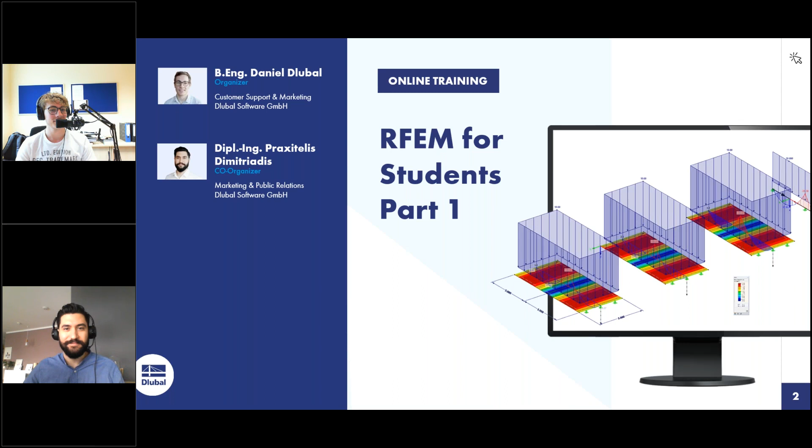Thank you, Praxitelis. Yeah, so as Praxitelis said, we are doing this training very interactively, so it will be divided into several sections and chapters, and after every chapter, Praxitelis will pick out the most interesting questions and we try to answer them as good as possible.

Short information about our training tool, GoToWebinar. We are using GoToWebinar in order to do these online trainings. First of all, if you do it, you see it like here. So here you have the possibility to show or hide this control panel of GoToWebinar, and here adjust your audio settings. So maybe when you can't hear us, please try to change your loudspeaker settings, and here you have the possibility to ask us questions.

Good. Then to the content of this online training. First of all, I will tell you something about the principle of FEA, the finite element analysis, or also FEM, finite element method. Then I give a short introduction, especially in the user interface of our program RFEM, and then we will model a continuous plate together. This will be the introduction example, and then also doing a stability analysis, in this case Euler Case 1. So we will have a clamped column and then a clamped frame.

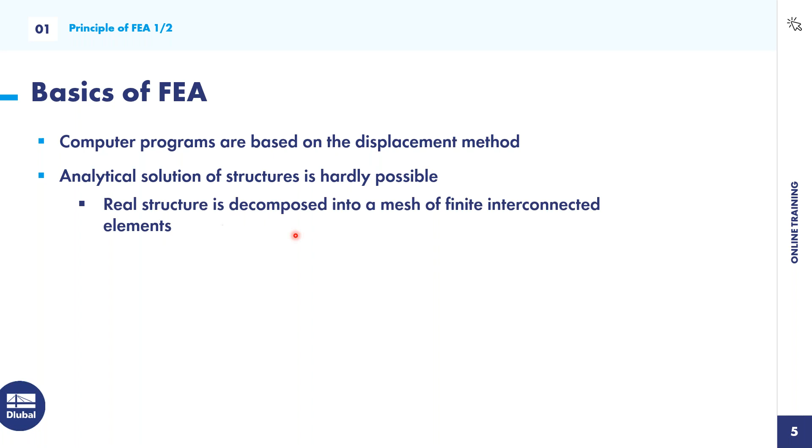So what you can do is decompose the real structure into a mesh of finite interconnected elements. And at every element or continuum, there are properties which will be described at the nodes. Then the mechanical behavior is described by approximation sets. Be sure the finite element analysis is just an approximation of solutions or results. And the most important point is the discretization.

So what is discretization? It's a decomposition of the structure into finite elements. This is one of the most important steps in doing a finite element analysis.

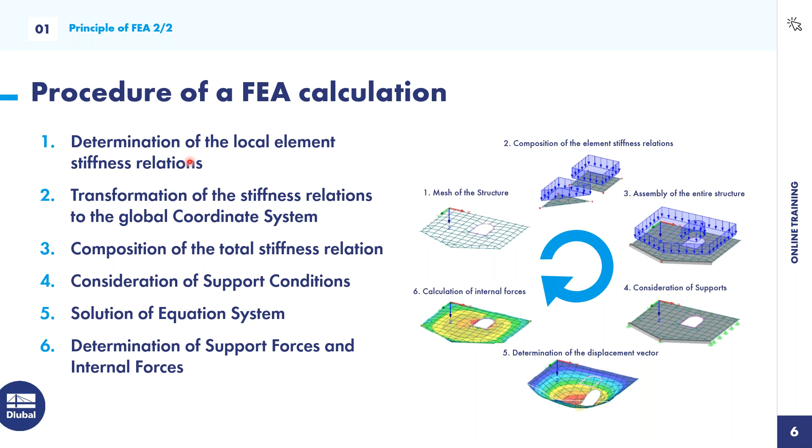So how does the procedure of an FEA calculation look? First, you determine the stiffness relations at local elements. You do a mesh of the whole structure, and then you transform the local stiffness relations to the global coordinate system, and then you assemble or compose the total stiffness relations for the entire structure. You also have to consider boundary conditions, like supports or hinges. Then the program calculates the displacement vectors, and after that you can calculate the internal forces and support reactions. Good, so much for the procedure of FE calculation.

Now, this will be our first example, the continuous plate. Before we do this continuous plate example, I prepared some questions for you.

First of all, I jump to RFEM, the program, and I want to know from you if you work with two monitors, two screens, because if yes, I will adapt my pace and this would be more helpful for you.

Sometimes it doesn't work in full screen, so if not, just exit the full screen and you should be good to go. Thank you for the hint, Praxitelis. That's maybe sometimes a problem, but this is the solution.

Good, I see most of you have chosen. I'll close this poll and show you the results. I see, okay, one third of you is using a second screen, and the rest of you is maybe just watching.

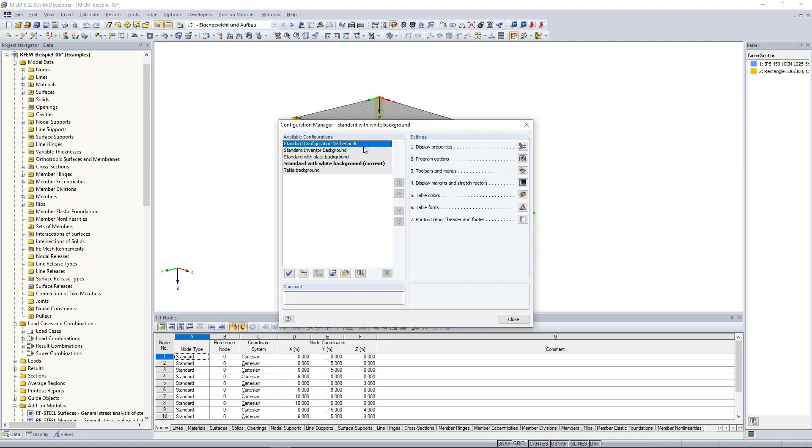On the options, when someone wonders why I have the white background and you're using the black background, you can change it here. Click on options, configuration manager, and change the white background to the black background. Double click on the black background, and now I have the black background. But I prefer the white background, so I click back to it.

Maybe also an interesting point is the program options, because we offer at Dlubal 10 different languages, including English, Dutch, French, Italian, and others. If you want to switch the language, just close the program and start it again, and all program settings will change to the right language.

Under the menu bar you will find the symbol bar. With the help of the symbol bar, you have faster and quicker access to the most important functions of RFEM. For example, if I want to create a new single member, I click new single member, choose a profile, and draw some members. This gives fast access to the most important symbols. You also have the possibility to modify your symbol bar with a right click, select customize, and then add or delete some symbols.

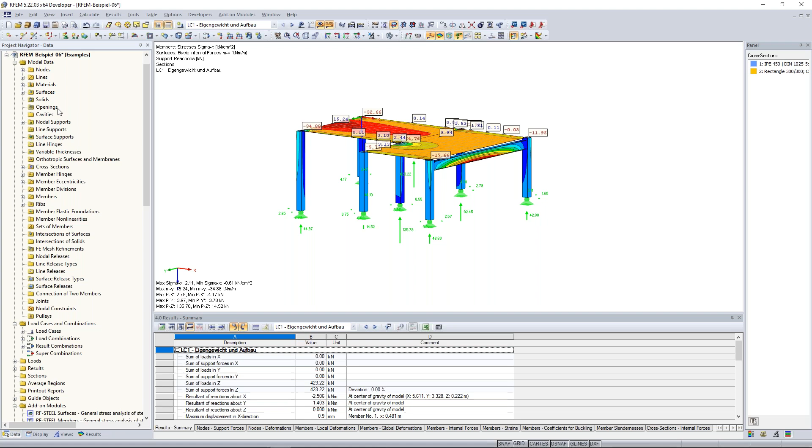In this case, I want to start with the first tab, the data navigator. Here on the left side, you see the data navigator, and with its help you have an overview of all existing model data. For example, the materials you are using for this project. When I open this tree, I see materials - 2 different materials: first the concrete, and then the steel girder here on the right side.

The same with the surfaces - I have an overview of all existing surfaces, and the same also for nodes and so on. When I click on one node, for example the 5th node, it will be selected in the work plane, but you don't see the node so well because the nodes are very small. So with a right click, select find, and a red arrow shows the node. The same also works for cross sections - if you click on one, it will be selected.

At the bottom, you will find the add-on modules, with short information about RFEM and the add-on modules. With RFEM, you can calculate almost everything. RFEM provides deformations, internal forces, stresses, support forces, and soil contact stresses - just these kinds of results. But when you want to design something, you have to use our add-on modules.

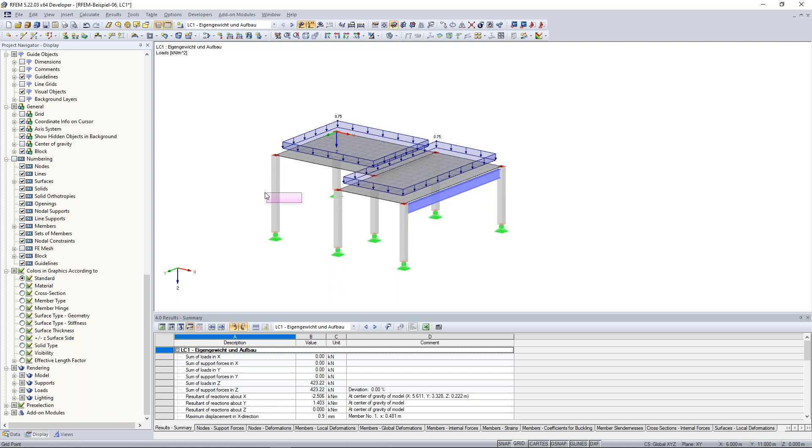One tip from my side: use colors in graphics according to cross section. Especially for frame structures this is helpful, because when you're using more than one profile, normally you use maybe 5 up to 10 different cross sections. This will show all cross sections in different colors, giving you a much better overview of your structure. Normally you have the standard colors, concrete is grey and steel is blue, but if you have more different cross sections, this kind of information is very helpful.

Now the views navigator. If you want more different views, especially later for the printout report, or when you want to divide your structure into better parts for your calculation, the user-defined views will help you. For example, if you like a certain view very much, click here, create new user-defined view, say this is my favorite view, click OK.

And when you change the view and want to jump back to your favorite view, just click here on the favorite view and you jump back to it.

The same also applies with visibilities. When you want to filter some objects or specific members, I would recommend using these visibilities. In this case, I want to show only my columns, so I go here and say members by cross section. I know the cross section of my column, so I open this tree, activate just the rectangle, and you will see just these members of that cross section. Very helpful to do that, and the same also with my steel girder here, the steel beam.

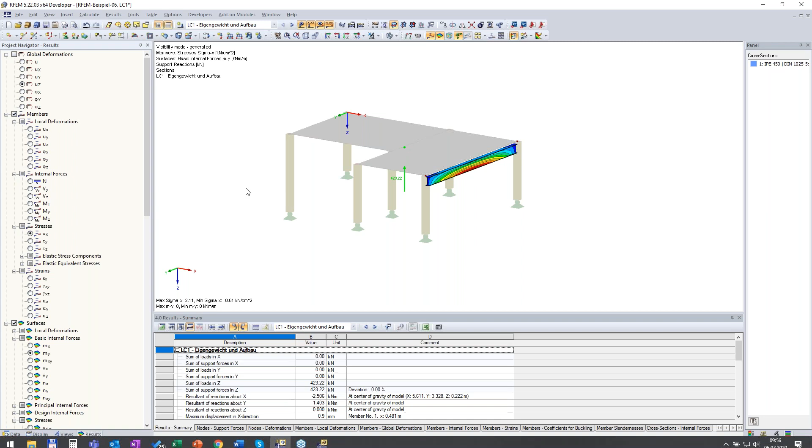Now to the last tab, this is the result tab in the navigator. Here you have the possibility to show different results, so I cancel my visibility filter.

Now I want to show the global deformation in UZ, the vertical deformation. I see here the steel beam and the plate. Now I jump to the member, and in this case the bending moment is interesting for me, so I see here the bending moment of the steel beam, and also the normal forces. Interesting, good.

A short information also about the tables. Here you find all information about models, loads, load cases and so on, also the results. The one big advantage of this navigator on the left side is that you get more information, like here in the data navigator. When I jump to materials here in the tables and to materials in the data navigator, you will see I have more information about the materials here compared to the data navigator. This is one big advantage, and you will see it interacts with everything.

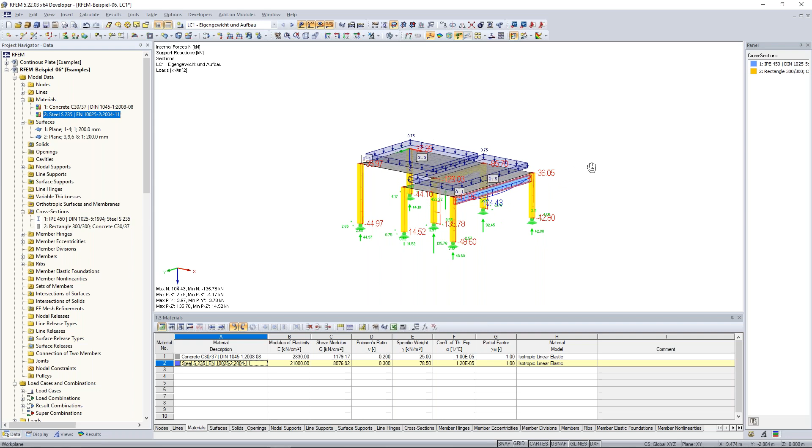Now some information, a short introduction to the movement in RFEM. With the left mouse click, I can draw a selection window. It depends on which side you begin. So when I go from the left to the right upper corner, down to the right bottom corner, I select just the things that are fully within this selection window.

Now watch when I do it from the other side, from right to the top corner. It will select everything that is not only fully inside the selection window, so also this plate and the steel girder. Here's the difference, please keep that in mind.

Also with the mouse wheel you can zoom in and zoom out, I think that's pretty clear. With the right click you get every time a context menu. When you click on the white background, you get the general context menu, and when you click on one of the objects, you get the context menu of that object or model data.

Good, I think that was everything concerning this introduction. Praxitelis, any additional information maybe?

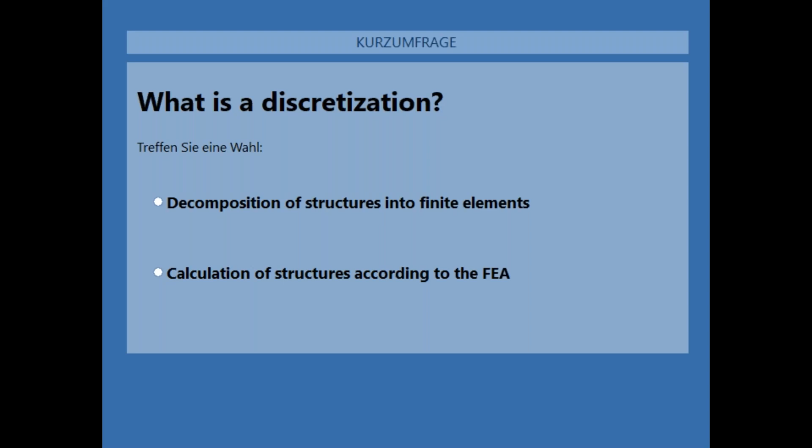Most of you have already chosen, so I close this poll, show you the results, and say the right answer. Most of you were correct. So what is a discretization? It's a decomposition of a structure into finite elements, and this is the right answer.

Okay, and the last question for this chapter is this one.

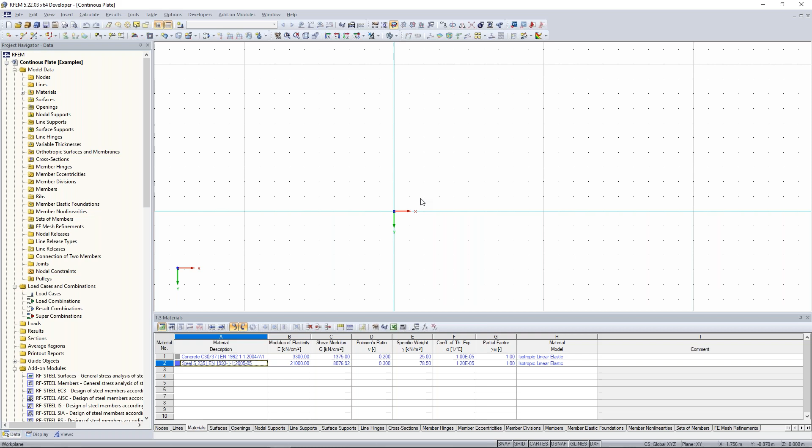First of all, I want to show how it will look like. It will look like that, yeah? We will model three different surfaces, and then we compare these results with our member, so with a continuous beam. We will discretize it into different meshes—different sizes of FE meshes—and it will be very interesting how the different results interact.

Good. So first of all, I create a rectangular surface. For that, I click here, go to the symbol bar, and click on rectangle. And here, first of all, I modify the material.

I click here on edit material, or if someone doesn't have this concrete C30/37, go to edit material and open the material library. Here you have the possibility to select one of a lot of different materials. In this case, I decide to take this concrete, referring to normal concrete and the Eurocode standard. I choose the concrete C30/37.

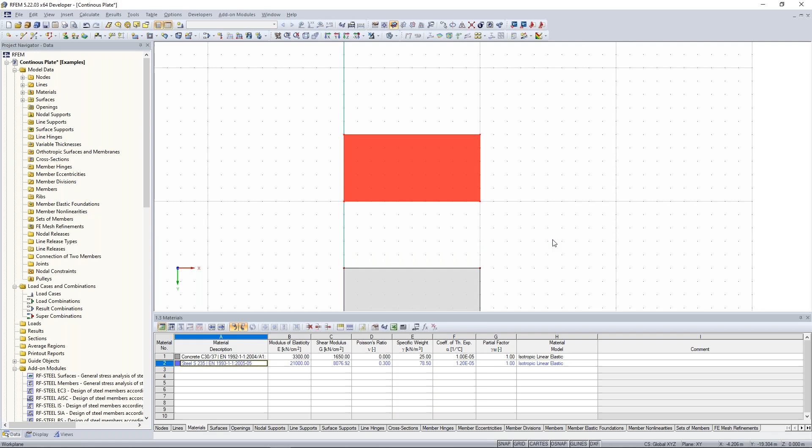And then I want to show you one big advantage—now we want to copy it. So select everything, draw a selection window over the whole surface. Now right-click on the surface and say move/copy. Here we say the number of copies should be 1 because we want to copy it, and the displacement vector should be from there to there. So now we have two possibilities: enter a value of -10, or pick the displacement vector.

I want to show you this option: select two points and return displacement vector. I click on that, say from there to there, and the displacement vector was created automatically. Click on OK, and voila, you will see this was copied here, exactly 10 meters higher.

Good. Now I want to have the additional continuous beam, or a beam. So I want to move these 3 surfaces a little bit. Draw a selection window over the whole 3 surfaces, and grab the middle surface here at the left bottom corner, and grab it from there to there.

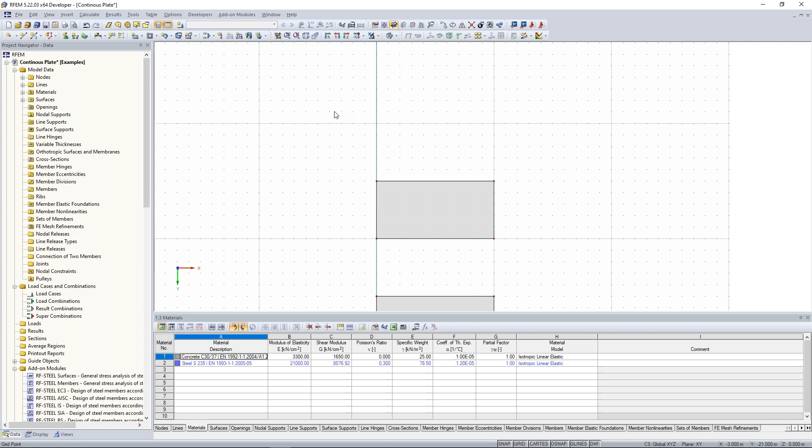Yeah, good. The next point is the creation of the beam there. I go here, create new single member. So in RFEM, it's like that: when you want to create columns, beams, girders, braces, and so on, you have to create members in RFEM.

I click on that, and because we haven't created a new cross-section yet, we have to create a new one. Go here, create new cross-section for member start, and then you have the possibility to set your cross-section properties manually, but of course you can choose one of these already provided cross-sections. Here I decide to take this rectangle cross-section.

So I enter the value of the width, 1000 millimeters, because I want to relate also to our concrete surfaces here, so concrete plates, and the height is 300 millimeters. The material is the same. I click here on OK, and again I click here on OK.

And I draw my member from there to there, also 10 meters long. Good. Now I pressed the Control key on my keyboard and also the mouse wheel, and I rotated my view of RFEM. Now I can see also a little bit 3D.

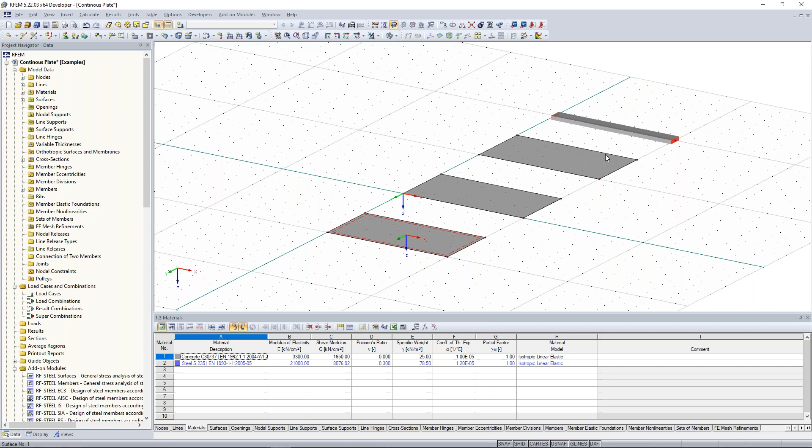Okay, good. So in order to calculate it like a continuous plate or continuous beam, we have to divide it because we need an additional line there in order to provide the line supports, and also an additional node in order to provide an additional node for the nodal support. So how can we do that?

Here we have the possibility to divide this line. Click on one line with a right click. It will open this context menu, and here on divide line we have three possibilities: graphically, by intermediate nodes, or by distance. I decide graphically.

And here I have the possibility to set the steps. In this case 0.5 meters is enough. And then when I go over one of these lines, I try to divide it at the length of 5 meters. You will see when I go through this line, it will change also. The right value will appear in the left window box. In this case, I have now x 2 meters, and here, for example, x 8 meters, but we need x 5 meters.

And this is one big advantage, you can do this at every line, but in this case it's okay when we do it only for this bottom line here. And you will see, okay, now we have two lines and an additional node.

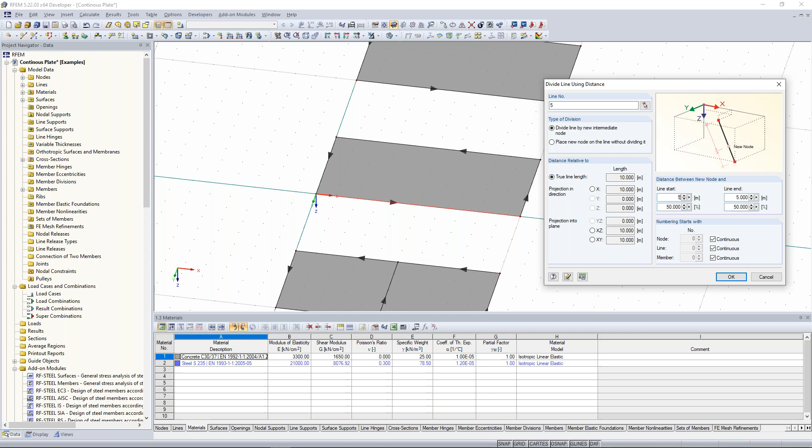Because here I can set from which length or from which distance RFEM should go to divide this. So when I set here 6 meters from the line start, this new node will be created at the length of 6 meters from the line start, or from the line end, 4 meters. It's very important to know that we have here in RFEM this line orientation and also this member orientation, and depending on the orientation of these arrows, you will see where is the beginning and where is the ending of this line. So in this case, I want to divide it also exactly in the middle, 5 meters, and you will see it here. Okay.

Now, one cool point is that we can copy one object or several objects, also a lot of other objects, with the help of a really nice function, and this is via drag and drop. So I click on one line, then press the Control key on your keyboard, and then left mouse click, and drag and drop it from there to there. The same thing we will do for this other thing.

Really nice thing. So again, press the Control key, click on the object you want to copy, and drag it from the favorite place you want to have it, and then left mouse click, and then you copied this thing here.

Good. Now, last thing is that we want to have here also an additional node. Here in this case, I want to divide it in another way. And the first difference is that we don't have here a line.

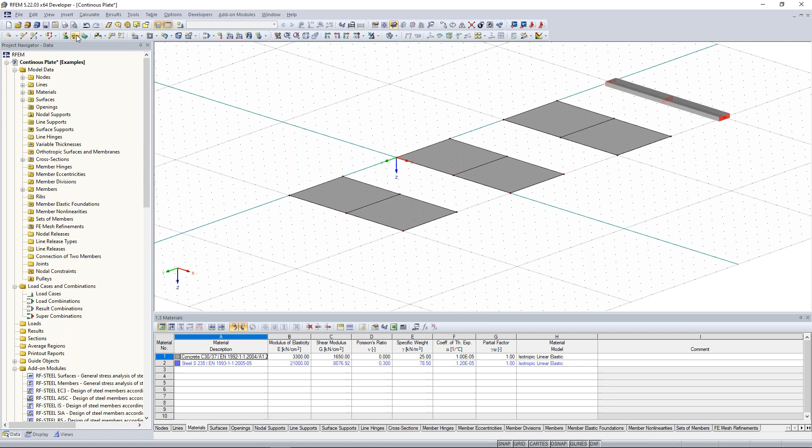Good, now we have to set our supports. You can create here in the symbol bar new line supports. I click on that, and we leave this option as hinged here. So please choose the hinged. When we go to create new type of line support, we see these support conditions are set so that we are transferring just vertical forces. Use that. Click on OK and choose the lines here.

You can also draw a selection window, but consider that you do it from the lower part to the upper part, also from the right to the upper corner here, like that. This is possible. Good, now the same thing for the beam.

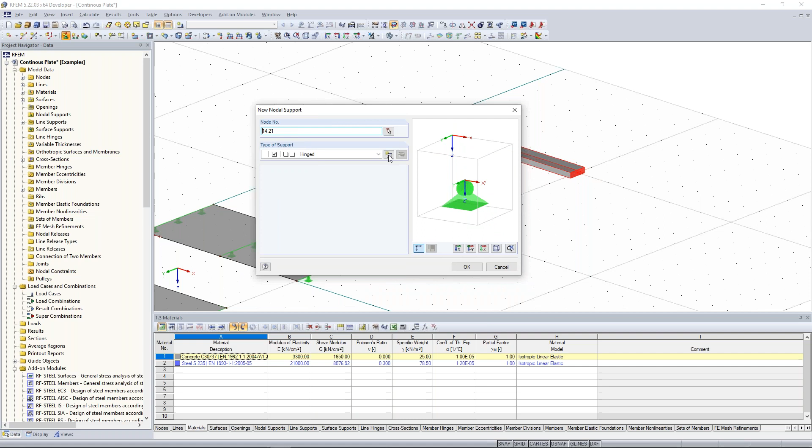First of all, I choose or select these nodes here. Doesn't matter if I have also this member chosen. I go here again to the new nodal support. And now I want to say something about the support conditions.

When I activate one of these displacements or restraints, this means that the displacements in this direction are blocked. So in this case, UZ is blocked. This will provide us a support reaction, support forces - in this case vertical support forces, because we are blocking the displacement into the Z direction. You will see it here also in this bitmap. And keep in mind that when you want the support node to carry these vertical or horizontal forces, then you have to activate this one. Good, I click on OK.

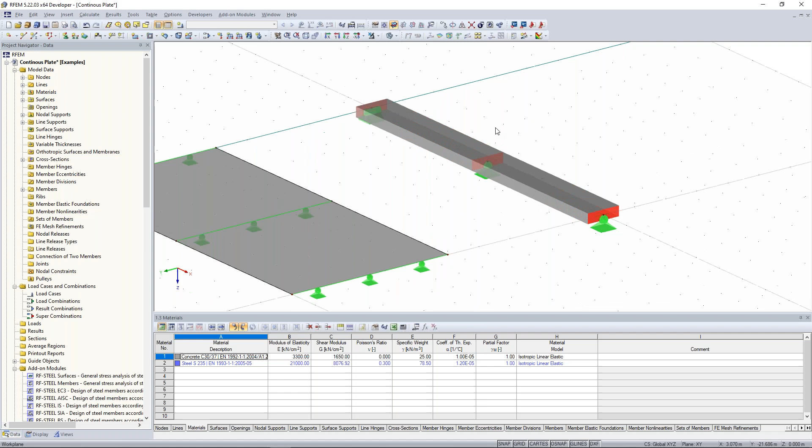Now one important point: in order not to have some torsional forces, we have to activate an additional restraint here. So I have to create a new type of nodal support. I have to activate this φX because I don't want to have torsional movements around the global x-axis. So I activate x, and I also activate uX. Click OK and click OK again. Otherwise it would be possible that the beam here could deform around its own axis, and this wouldn't be helpful - it wouldn't be good because then we would get an error in the calculation of RFEM.

So next thing is adding loads. Before we add some loads in RFEM, we have to first define some load cases. What are load cases? Load cases can be self-weight, imposed loads, wind, snow loads, and so on. In order to do that, we click here on new load case. Here we see different action categories, also the load description. In this case it's okay when we write just 'test load' or something like that, doesn't matter. In order to compare the results better, I deactivate the self-weight, and click on OK.

Good, now I put some loads there. In this case, the new surface load, because we have 3 different surfaces here. I click on new surface load. I refer to the global, related to true area. My magnitude is 10 kilonewton per square meter. I click on OK and choose my surfaces here. The same thing I do for the member.

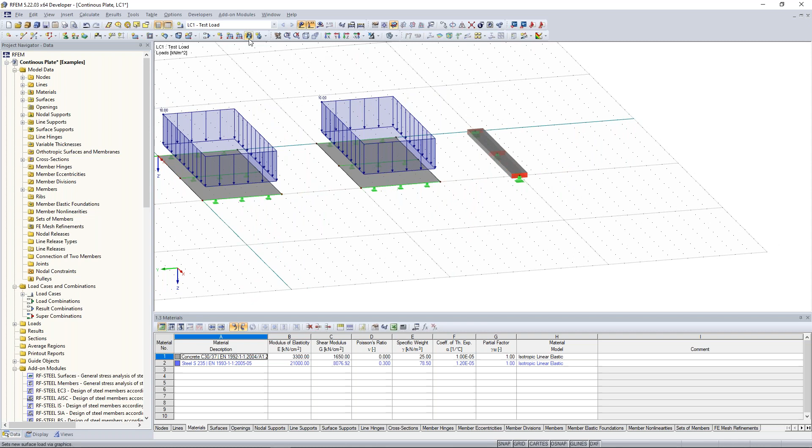For members, I need member loads. In RFEM, there are also some line loads - please keep that in mind, there is a difference between these two. Member loads are really just for members, like here, this is a member, or frame structures. Here you have also members, so please use the member load. But if you want to put some loads on edges of some surfaces, then you have to use line loads. For example, when you want to consider some wind loads, then you have to use line loads.

Okay good, here in this case I use member loads. I click on that. My load parameter is 10 kilonewton per meter. And I draw here as my selection. Good, almost done.

Now I don't want to show the loads, so I click here on this eye icon with the loads, and I deactivate the showing of the loads. Now I want to do a discretization, so I want to have different sizes of FE meshes - one bigger, one in the middle, one smaller. And here we leave it like that at the member. In the data navigator, you will find the different FE mesh refinements. So click with the right click on one of the FE mesh refinements and select new FE mesh refinement.

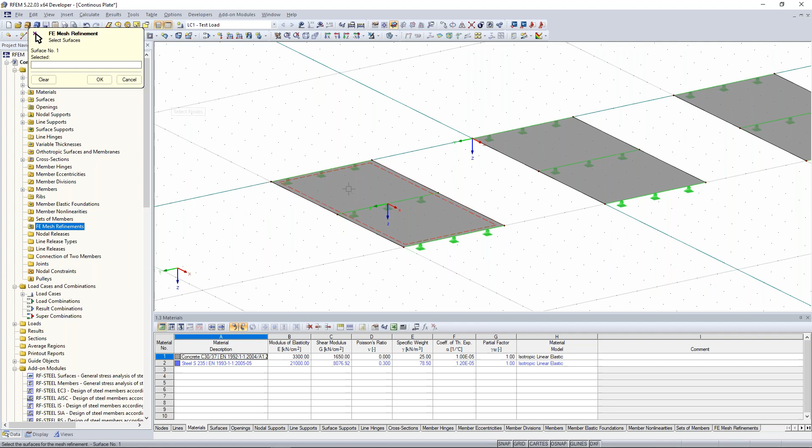Here you have the possibility to relate or apply to the surface. Enter the value of 1 meter for the target FE length, and choose the right surface. I click here, choose this surface, click OK, and then OK again. This FE mesh refinement will appear here.

It is symbolized by this quadratic window here, and we do the same thing for the other surfaces too. So again, right click, new FE mesh refinement, select the right surface, and enter a value of 0.5 meter.

Here the same thing, but we can do it also in a different way. Right click, FE mesh refinement, new, the number is already right. Click here and put in a value of 0.1 meter. Okay, good.

Next thing are sections. In order to see the results in an integrated way, we need sections. For that, I create 3 different sections for the plates. So here, right click in the data navigator, you find these sections. With the right click, I create a new section and give it a name, in this case AA.

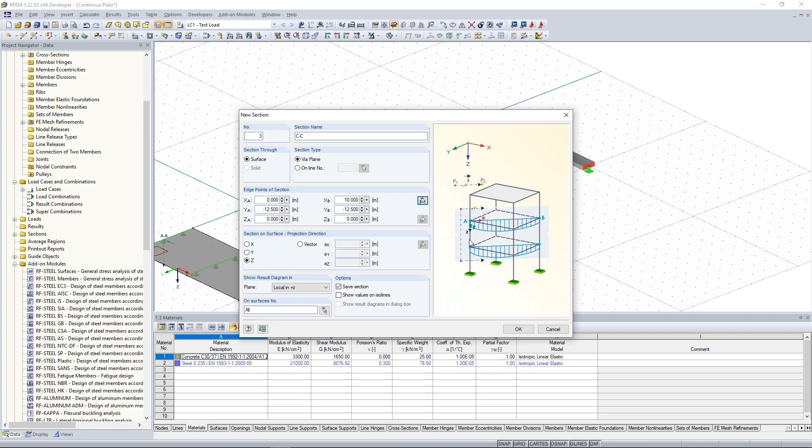Okay, good, now we have everything. Now we can calculate it. For that, you can click here on Calculate All, or here on Show Results, same thing. When I click on Show Results, this window will appear: results from load case 1 not found. Start calculation. Okay.

First of all, what you see is always the deformation, and first of all, check if the deformation is okay. Yeah, the deformation looks okay. Here at the member, you will also see deformation, and when you want to have it in a better way...

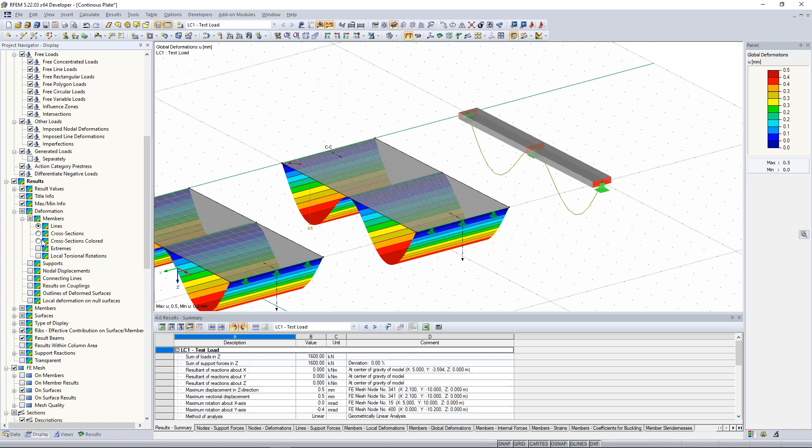...the way of showing that: go here to the display navigator, click on deformation, go to members, and say the cross section should be colored. You will now see the coloring of the deformation of the cross sections.

Okay good, now first of all, how we can prove our results: first I want to activate the sections here, and I refer to these kind of basic internal forces. And I activate also these members here, bending moments.

Okay, what we can see now: first of all, we see here the bending moment, first of all of the member. I think that's pretty clear. We have here field moments, then we have here this negative moment, and here also the same thing.

Now, a very important point: there are different FE mesh sizes. Here we have this 1 meter discretization, here 0.5, and here 0.1. And you see, the bigger the FE mesh size is, the results aren't as exact as here at the very fine FE mesh sizes.

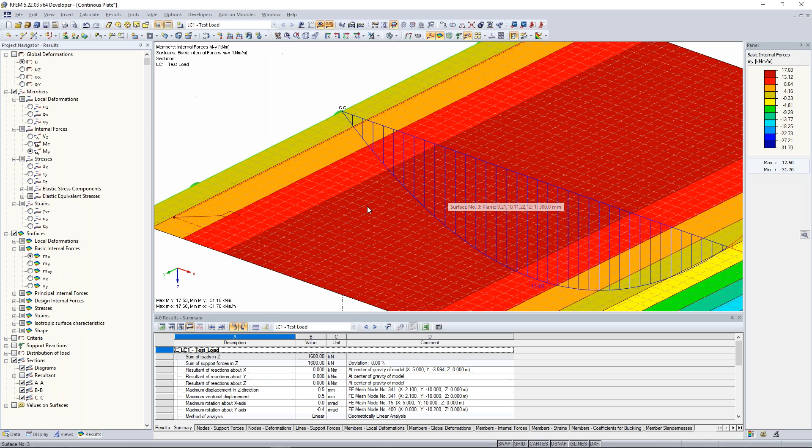So here at every 0.1 meter, one result is provided. Here on every 0.5 meter, and here at every 1 meter. Please keep that in mind.

It's up to you how you will do that. Because look at this one, look at this distribution here, we have here linear things. And when you compare these kind of results with that one, you will get different results.

The results at specific points, like here at the middle, so here at the line supports, are very similar. But when you compare the results maybe at 1 meter away from that, you will definitely get different results. Good, this is an interesting thing.

And maybe someone of you is asking, okay, why are the internal forces, in this case the bending moments, a little bit different in comparison maybe to my hand calculation? Because in our study, we use our hand calculation, maybe some formula in order to get that. And normally there should be maybe some nicer values, I would say - so not here this 31.18 kilonewton meters, but 38.25 kilonewton meters.

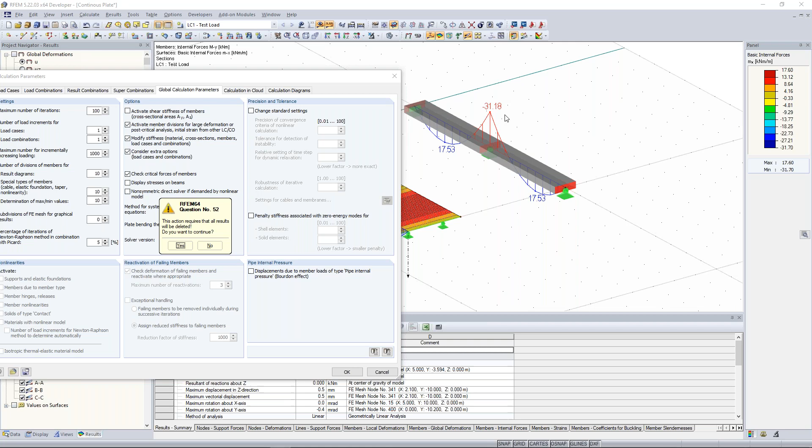So now watch out when I deactivate that. Watch the result of the member. I calculate it again. And you will see the different result. Now you have the same result in comparison to your hand calculation. When you want to compare your results with your hand calculation, please keep in mind that you have to deactivate the shear stiffness here in RFEM. Good, so much to that.

Praxitelis, are there any questions or should we mention something, strengthen something? Yes, Daniel, we've got two questions. One is, according to what do we choose the number for the FE mesh refinement?

Or the scale, let's say so. Okay, yeah, it's just a simplification, I would say, to show you different FE mesh sizes in order to show you how these different FE mesh sizes will react to different results. If you have too big FE mesh sizes, you will not get such good results. And if you have very fine FE mesh refinements, like here, you will get very good results, but the program needs more calculation time, it will calculate longer.

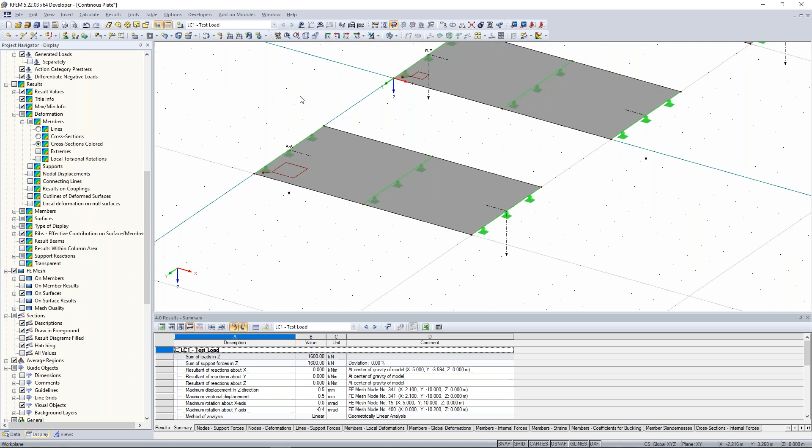So when I deactivate that, show me just the FE mesh. You will see, okay, you have here 1, 2, 3, 4, 5 FE elements. This is okay, but it would be better when you have more than that.

Okay, next question maybe. We've got the question, what is the difference between line load and member load?

So you have here a member, yeah, this continuous beam. This is a member. In order to add some loads there, you have to use member loads because member loads are referring really to members. But when you want to put some loads on a surface, on the edge for example, this isn't a member, so you have to use a line load, yeah.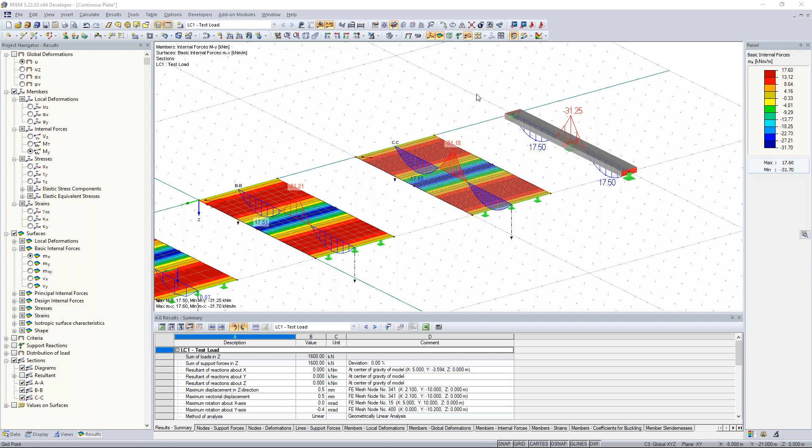And the last question is, at the result, can I change only the orientation of shear forces without changing the orientation of bending moment? I understand. So here you want to have, here you see the shear forces and you want to change maybe the direction, I think. Yeah. I don't know if that's possible, but you can change the orientation of the member and then we will see how it will influence the shear stiffness, the shear forces.

So select this one, say member orientation off, then you see here this member orientation. Right click and say reverse member orientation. Then you have to recalculate it.

But yeah, the shear forces are now on the opposite side, of course. But the bending moment is on the right side. Because when you want to see maybe the tension...

Praxitelis, do you know the word for Zugfaser? Bottom fibers, maybe? I think this is tension. Tension fiber? Tension fiber.

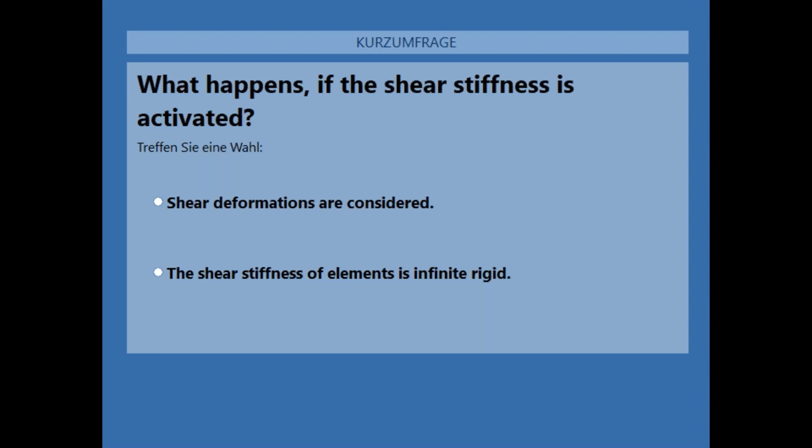Okay, good. Most of you have chosen. I close this window, show you the result. What happens if the shear stiffness is activated? The right answer is the first one: shear stiffness or shear deformations are considered. I think that's clear now.

Good. So now I jump back to my PowerPoint presentation because I want to show you some theory about the plate theory. So in the study, you learn first of all the beam elements, so the normal beam theory, the calculation beam theory. And normally it is like that you learn the normal Bernoulli beam theory. But there's also the opposite of that: the Timoshenko beam. So what is the Bernoulli theory?

First of all, there is the cross section. When I deform something, it remains in plane, and the cross section remains also perpendicular to the member axis. I have also prepared a picture later for that. And one important point is that we don't consider any shear deformations, because our shear stiffness is also rigid. This is one thing you study, you will calculate in the study. You will start with that because it's easier to consider, to calculate. And also a lot of the formulas you use are similar to that.

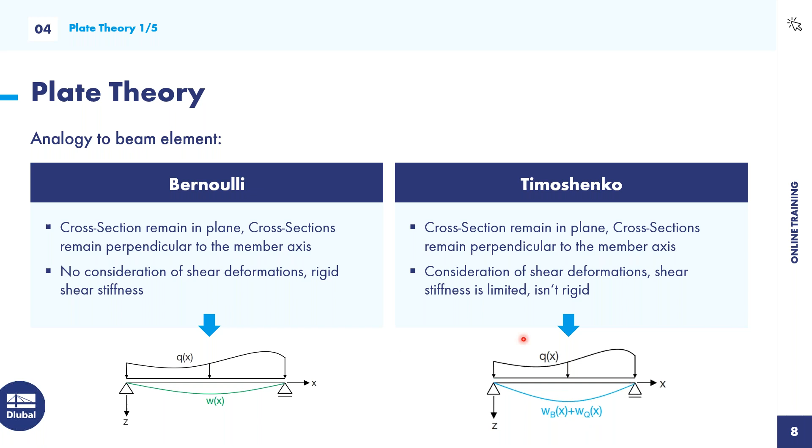Good, but there's also the Timoshenko beam. And the Timoshenko beam has the same things as the Bernoulli: the cross section remains in plane and so on. But you consider shear deformation, and also the shear stiffness is limited, so it isn't rigid anymore. So we get an additional shear deformation, the WQ, and also more deformation. So here we see, okay, it remains in plane, perpendicular to the member axis. And here at the Timoshenko beam, we see we get an additional angle, the gamma angle, so additional deformation.

So this beam theory, we can also transfer to the plate elements. So on the left side, similar to the Bernoulli beam, you have the Kirchhoff theory, and also the Reissner-Mindlin theory. For the Kirchhoff theory, here's some information on what we are referring to. We have geometrical linear, meaning we are looking just for small deformation, and linear elastic material law, so we are using Hooke's law, and the cross sections remain flat. So we have no warping, and also constant thickness, and also no consideration of shear deformations.

Reissner-Mindlin: the four things are the same, but similar to Timoshenko, we consider shear deformation, and we consider also transverse and lateral strains. What are transverse and lateral strains? Imagine you have a beam, and you tie this beam with tension forces, and along its length it will get thinner, looking at this cross section, at its width but also as well as its height — this is the transversal lateral strain. Here also with this mu factor, it will provide this lateral strain.

Back to the plate theory, where we transfer to the plate elements again. So Kirchhoff, as a summary, no consideration of shear deformations. So when I calculate with this Kirchhoff theory, these results are good enough for thin plates. Thin plates are normal concrete plates you use in normal building structures and so on. So you are considering just pure bending load bearing capacity, and this is also only a simplified approach. Otherwise, with Reissner-Mindlin, the results are good also for thin plates, but also for thick plates. And the component of the shear influence is relatively high, so you have to consider these kinds of shear deformations. And when we would neglect these shear forces, the errors and the bad results would be very high.

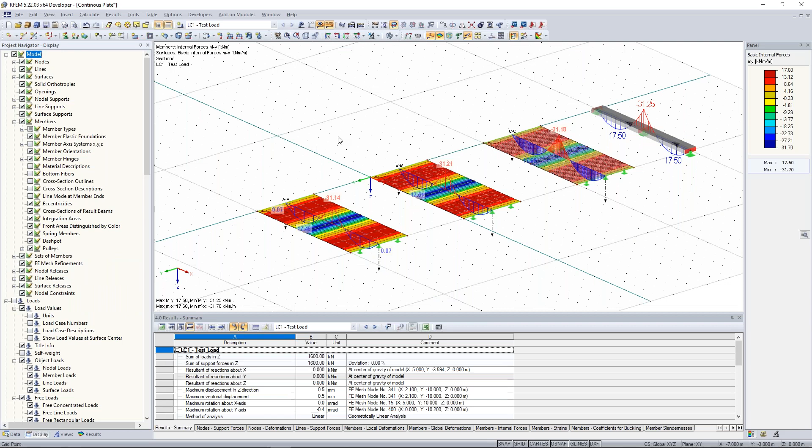So let's look also to RFEM, where we can do that. So under the calculate menu bar, you will find these FE mesh settings, the calculation parameters. And here you find the different plate bending theories, Mindlin and Kirchhoff. Now remember these values here. I choose Kirchhoff, calculate it again.

So here you will see now the different results. There's a difference, and the greater the thickness of one plate is, the greater is also the difference between these two calculation theories. My recommendation for you: please use Reissner and Mindlin. Then you are always on the safe side.

Good. Now let's jump to the next example. This is the Euler Case 1 and the stability analysis of a frame. In the study, you learn also the stability analysis a little bit, buckling cases and so on, and for sure also the Euler cases. And we want to have the same here also with RFEM.

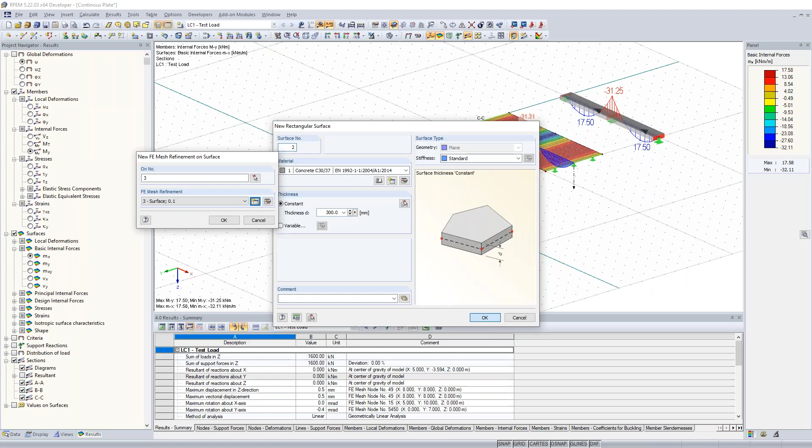So for that, please create a new model. I create here a new model by clicking on new model here on this white sheet. I write 'Euler Case 1', put it here to the examples, and now the important point is here the type of model should be 3D, please, because we want to consider both directions concerning the buckling figures. So I want to activate here this 3D type of model, and my z-axis is orientated downwards.

Yeah, one of my projects already exists, so I write there. Yeah, good. I have to take a sip of water, I'm a little bit thirsty.

Good. So as I said before, with RFEM you can calculate not only plates, surfaces, and so on, but also frame structures. So we want to do that. In order to do that, go here, click on New Single Member.

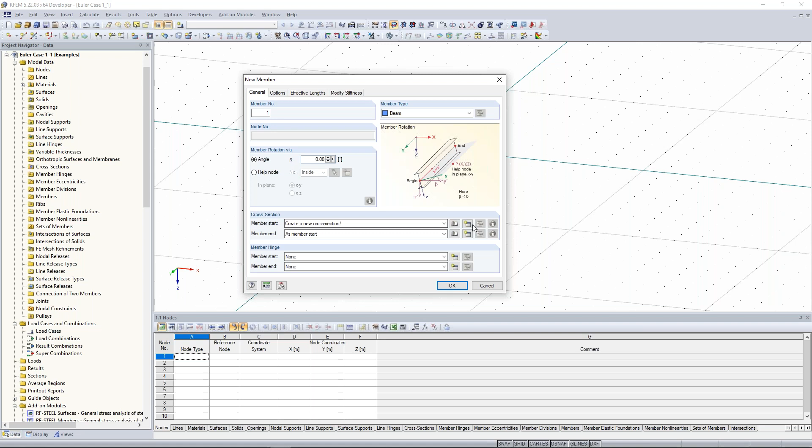And here I have the possibility to create a new cross-section. I do that. Because I am from Europe, or better, I'm from Germany, it's very common that we use our HEB profiles. So I click here on one of this HEB profile. When you don't have it here, click on the material, on the cross-section library. It's the same. Choose one of the rolled cross-sections.

And choose here HEB profile. There's a wide I-beam with parallel flanges. So here we have our flanges, here the web, especially used for transferring a lot of bending moments and also compression forces. And we choose this HEB profile 300. Click on OK.

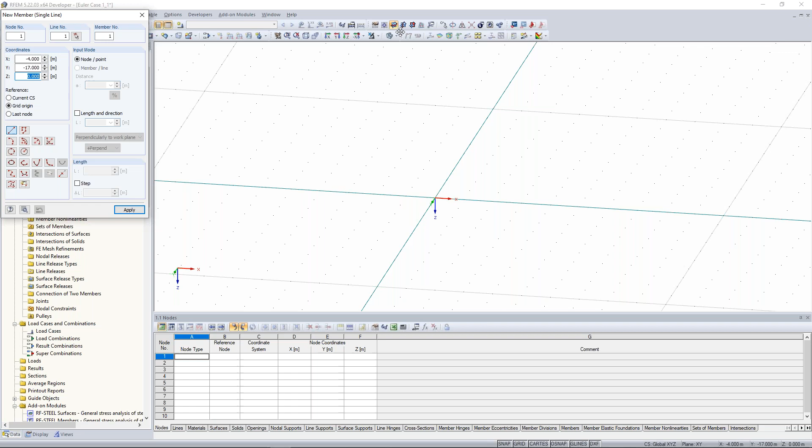Again, I click on OK. And now I want to make this column 10 meters high. Now you will see I have a little bit of a problem because I use now the work plane in XY, you see it here. Here I have the different work planes now, but when I want to do that 10 meters high, it will not be possible because I also refer to this flat plane here. So one possibility is to change the work plane, like here.

I can change the work plane and now I can draw my column 10 meters high. This is possible, but there's also another smarter solution in my opinion: I set the length and direction. So here I have this window, I set the length and direction perpendicular to my work plane, set here the length, should be 10 meters high. And you will see here now also this member, but not to the positive Z direction, but into the opposite Z direction. I refer to my origin node here and click on OK.

Now you see here this member. So now I want to add some supports here. I select here the lower node, go to the symbol bar, click on New Nodal Support. And here I activate rigid, so all constraints and all displacements, all rotations are transferred to this support. You can see also here these support conditions.

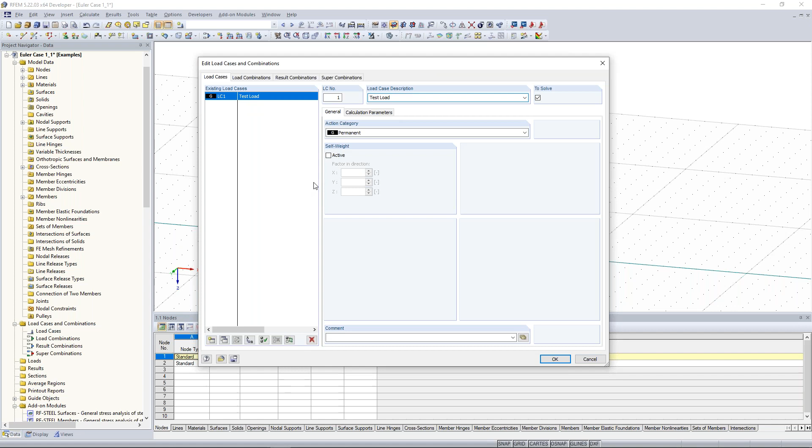Now put there one new nodal load, a single force. Enter here a value of 10 kilonewton. Click OK. And this was the wrong node.

Please draw it from there to there. Okay, I made a mistake, unfortunately. I want to add this single force here to that node. Click new node load, put there a value of 100 kilonewton, and refer to this node here.

Now, one important thing: normally the program calculates it by the theory of first order. So when I look to the results, I change my view a little bit in order to see this better. Go on view, reverse in Y direction, and I see it here. So the displacement, the deformation aren't interesting for me now.

For me what's interesting is the bending moments. So I have no bending moments. I think that's pretty clear.

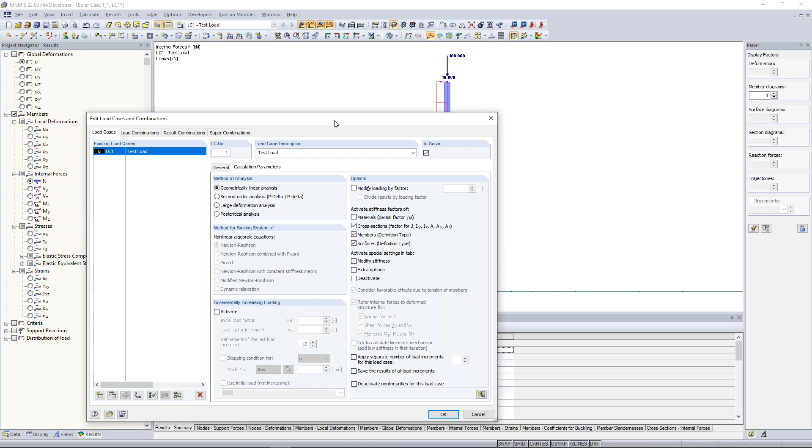But you also have the possibility to consider second order analysis. Maybe someone knows this under the name P-delta. I want to show you the different results concerning that, because in Germany we have the second order analysis and also the geometrical linear analysis. When you consider these two kinds of calculation theories, there are some differences.

And I want to show you the differences. When I activate this second order analysis, first of all we have a compression force of 100 kilonewton and also a bending moment of 100 kilonewton meter. I think that was pretty clear.

Now, with the help of the second order, you make a calculation, so you see the equilibrium on a deformed structure. So I calculate this again. And first of all, I want to show you the horizontal displacement.

In this case, UX, remember this 68.7 millimeters. When you multiply this by 100, you will get an additional bending moment of 6.87 kilonewton meters. Now look to the bending moments. Here we have a total bending moment of 106.87 kilonewton meters, because with the help of the second order, there we make the equality.

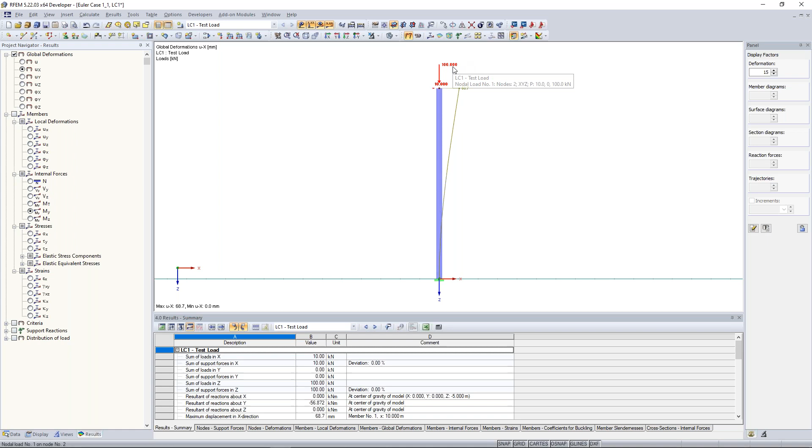And when you have just the geometrical linear analysis, you calculate this in the undeformed structure and also get these results at the undeformed structure. Here we have the second order, the P-delta, and therefore you have additional bending moments due to this horizontal deformation. This horizontal deformation multiplied by this vertical force will provide you this result at the bending moment, and provides additional bending moments.

So I want to show you that in different windows, maybe. Sorry, this one.

So here I have the bending moment, here I have the normal force, and here I have the shear forces. When I look now to the horizontal deformation, you will see this deformation multiplied by the vertical force will provide me an additional bending moment of 6.87 kilonewton meters. The normal bending moments are this horizontal 10 kilonewton multiplied by the lever arm of 10 meters, and this will provide me this bending moment.

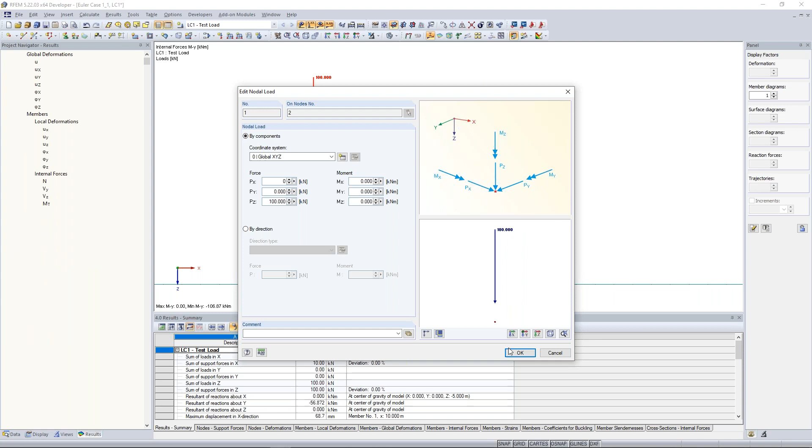Now we want to make a stability analysis. I put this horizontal force away, so I write the 0. I just have this vertical force. And now I want to make a stability analysis. What does it mean to make a stability analysis? I want to see different buckling cases and also to see the critical lengths.

So I have to start one of my add-on modules, in this case RF stability. When I open this, it will open this window here, and RF stability makes a stability analysis by the eigenvalue method. So it will provide critical lengths, also critical values for this calculation of stability.

So for that, I want to have the lowest eigenvalues. Number of eigenvalues should be 4, not more. I refer to this load case, test load, and I want just to consider this. I don't have to activate minimal initial pre-stress.

But one important thing is that we activate the division for straight members. So I add the FE mesh settings for members, and there I have to modify it to 10. So the minimum number of member divisions should be 10. I click on OK.

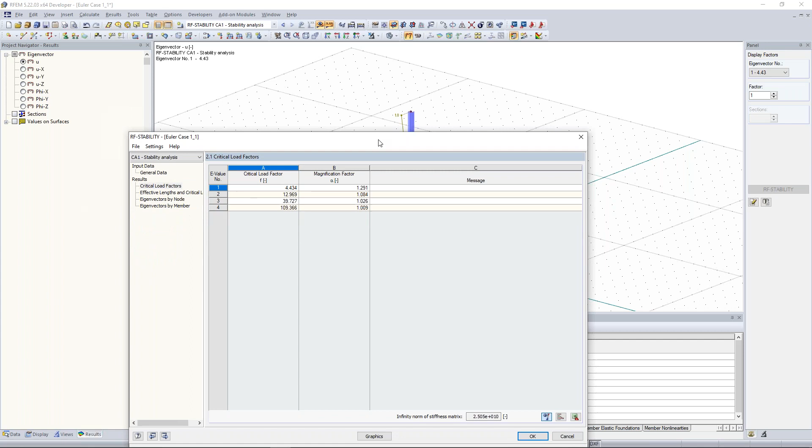Now to the effective lengths and critical loads. Here you see again this critical load. These are the 443 kilonewton. When I have more than this one, my whole structure would collapse. I will get an instability, and my program wouldn't calculate that.

And here I see also the different effective length factors and also the effective lengths. These are the buckling lengths here. So when you consider these Euler cases, because we have Euler case 1, we also have effective length factors of 2. Maybe someone is wondering, why isn't it exactly 2? This is also due to these shear stiffnesses.

So, but first of all, let's look at these effective lengths and the buckling cases, the different eigenvectors. So I click on graphic, and here I see the first eigenvector or eigenform.

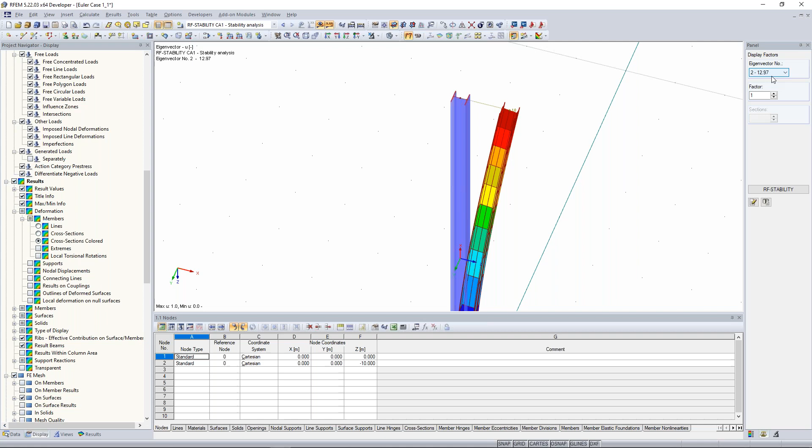And here I have a critical load factor of almost 13. This would mean that I would multiply my 100 kilonewton with almost 13, then this would collapse around its strong axis. Yes, and also some other eigenforms and so on.

Now I want to show you what happens when we have more than these 443 kilonewton. So we have 100 kilonewton. We activate the calculation parameters, calculated by the second order analysis, so the P-delta. And now we put there more than 443. In this case, 444 kilonewton, and we will get an error.

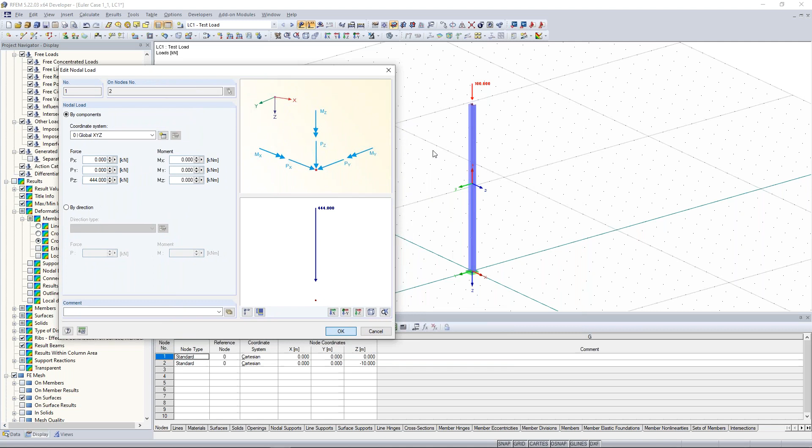And we calculate again. Yeah, and there is the error message. The stiffness matrix is singular. The model is unstable. Instability found in FE mesh number, and so on. There is a possibility how you can handle that. This means that we have too much load on our structure.

And now when I put there 443, it would calculate because this is under our critical load.

Now when I jump to the RF stability - sorry, I have to calculate everything first. I open RF stability and you see my critical load factor is now 1.001.

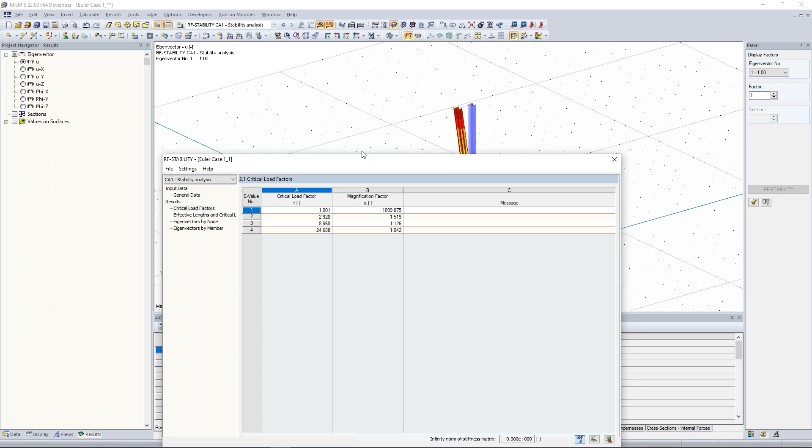Some short information about this critical load factor. If this critical load factor is under 1, so 0.9 or 0.8, then you will get an error message when you calculate your structure by the second order.

And if you have values of critical load factors between 1 and 10, you have to consider a calculation after the second order. Everything over 10 is okay - you don't have to consider any second order.

This applies when you calculate according to Eurocode 3. Eurocode 3 is where you calculate steel structures - there you have to consider that.

Okay, good. So much to the critical load factor.

Praxitelis, are there some questions? No, Daniel, no questions yet. So I think we can carry on.

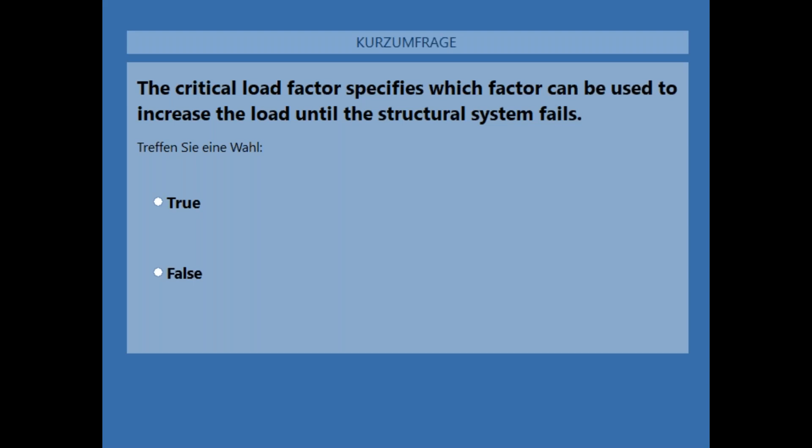Okay, good, most of you have chosen. I close this poll, show you the results. Of course, the critical load factor says: which factor can I use to increase load until my whole system will fail?

Okay, so the last example of this online training is modeling a 2D frame structure. I show you here again this one.

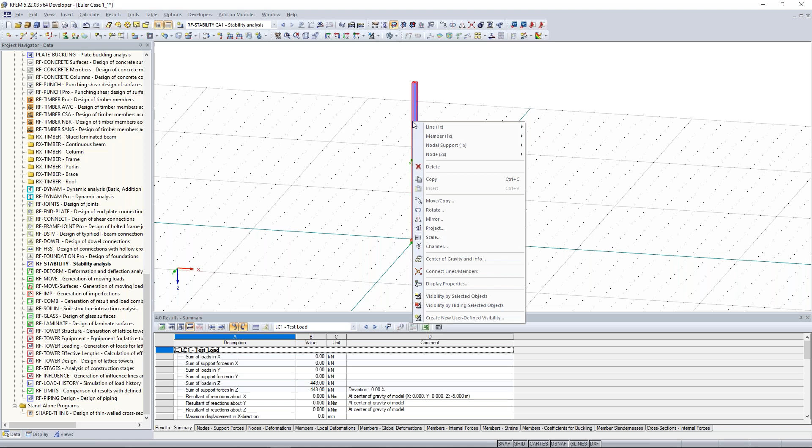Okay, good. For that, I copy just here this column. So I draw a selection window of that. Right click, say OK, move and copy.

Number of copies, 1. And the displacement vector should be 10 meters to the X direction. Click on OK.

I deactivate the member axis now because I think that is clear now. And now I can change the height of this column here.

When you want to change something afterwards, that's every time possible. Like here, for example, I want to change the height of these columns. I select the upper nodes here, right click on one of these nodes.

Click one of these nodes here, say okay, edit node. Because the nodes have the same coordinates, the coordinate Z will appear, and here you can change it now. We change it here to -6 meters. I click on OK.

And now I want to model a girder from there to there. For that, I decide to create a new cross-section. So I click here on New Single Member. I create here a new cross-section for the member start.

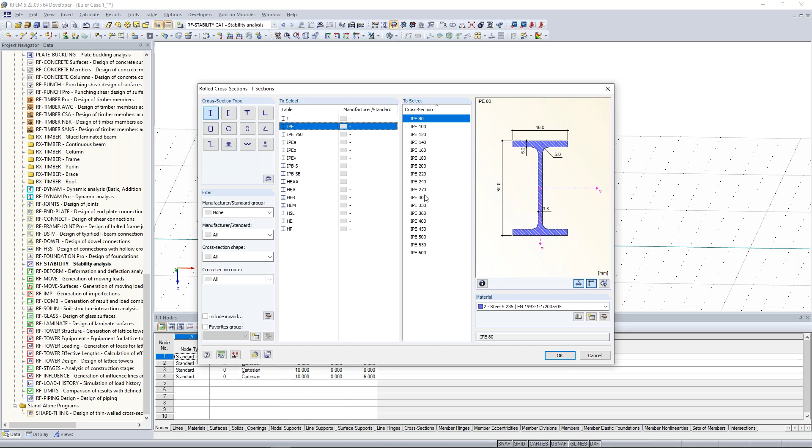And I take this IPE profile. IPE profiles are very popular for using, especially as girders and beams when you get a lot of bending moments, because they are cheaper to produce than these bigger HEB H profiles here.

Okay, I choose here this IPE 300 profile, click on OK, click again on OK, and draw this girder from there to there, so from the left side to the right side. With right click or escape, I close this window, and I have here now a frame.

Good. And I look back to my load case. So I jump there to the load case, and I copy now this single load.

From one corner to the other corner by drag and drop. So again, I click on one of this, I click on that single force, press my control key on the keyboard, and copy it from the left side to the right side.

Now I want to change the values, so I select them by drawing a selection window from the right to the upper left side. Right click on the force, click on edit nodal load, and here I say okay, I want to have 100 kilonewton.

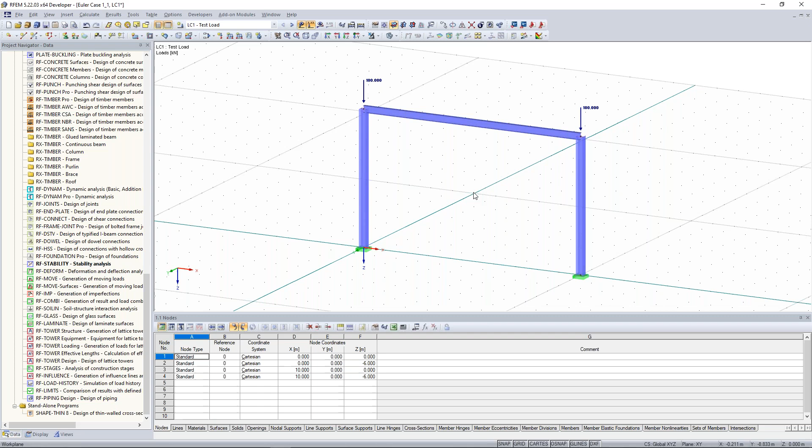Now I say again, okay, calculate all, please. And now we look to the different buckling cases.

Okay, now jump back to the RF stability. Here we see the first eigenvector, the second, and the third, and then the fourth. Okay, so what we can see now.

The first one is out of the plane. We can make the displacement factor a little bit bigger. So the first buckling is out of the plane, the second also. When you compare it to real structures, this shouldn't be possible.

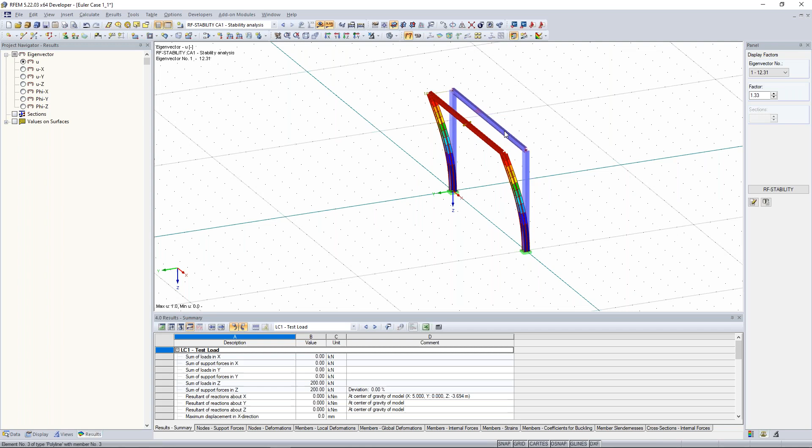This is one of the main things we as structural engineers don't want, that the frame should have this buckling case, because this is not very good. And that's also the reason why we have continuous beams, which will hold this whole structure.

I can show you that also in a real hall, for example. I click here on the project manager. I have maybe somewhere a nice example. Yeah, for example here.

In order not to have this kind of buckling case, we have here also these continuous beams, and they will hold this frame here in one plane. But here in this case, we don't have this, and this is also the reason why this will fail first.

This third eigenvector is that buckling case or eigenform that's very familiar, because this is maybe something we already saw in our studies. I think that is pretty clear. In order to get this as the first buckling case or first eigenvector, we have to consider the right boundary conditions.

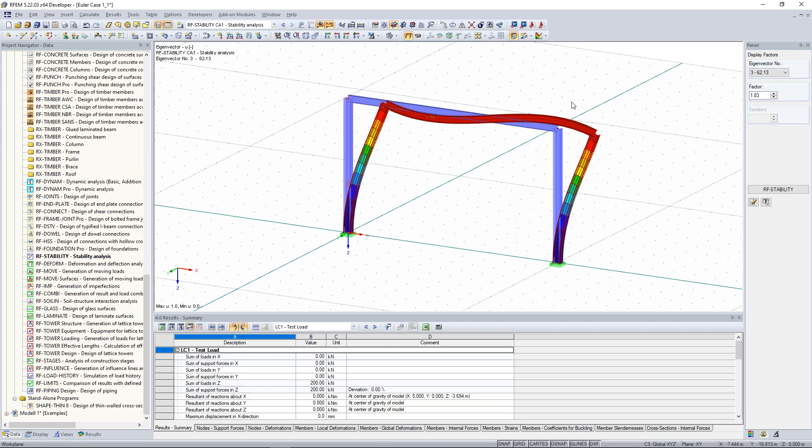So we can add some additional nodal supports, and then we don't have this kind of buckling form or eigenform. So let's do that. I take new nodal support, and what we have to do now is make sure we don't allow any deformation in the y direction.

I click on new nodal support, click here on new type of nodal support. I activate only the UY because I don't want any deformation in the y direction. So I have to activate this UY. I click on OK, again on OK. I select this node here, I select this node here.

Now watch out what we have for eigenforms. I calculate everything. Now my first eigenvector is this one I wanted to have. So I think this is pretty clear now.

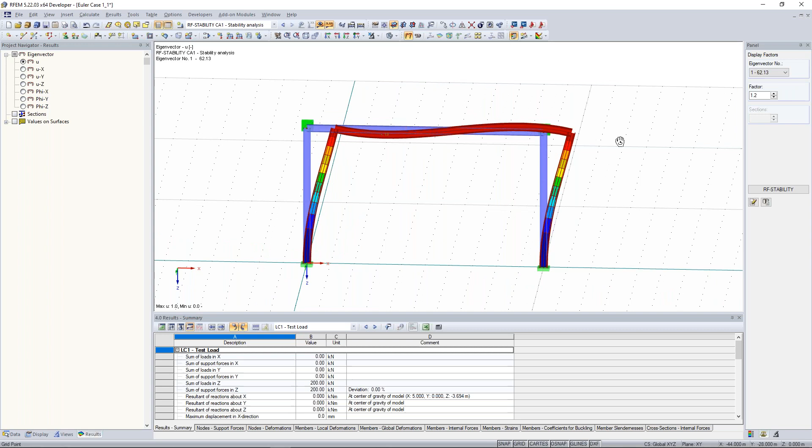But now you see, I have again some buckling forms out of the plane along this column. So in order not to have this again, I can change the system from 3D to 2D. I'll show you the difference.

Go to data, go here to the data navigator, to the right project, right click on general data and change the type of model to 2D XZ. Then this window will appear asking do you really want to change the type of model? You say yes. Now you have just this one plane, and also these boundary conditions are a little different because now it can't be possible that this frame can deform out of this plane.

So let's look to this RF stability results again. No support of restraint, no problem, because now we have done the supports at the node. Now we have the first eigenvector and the three other ones are just in the plane. This is something you have to consider. Good.

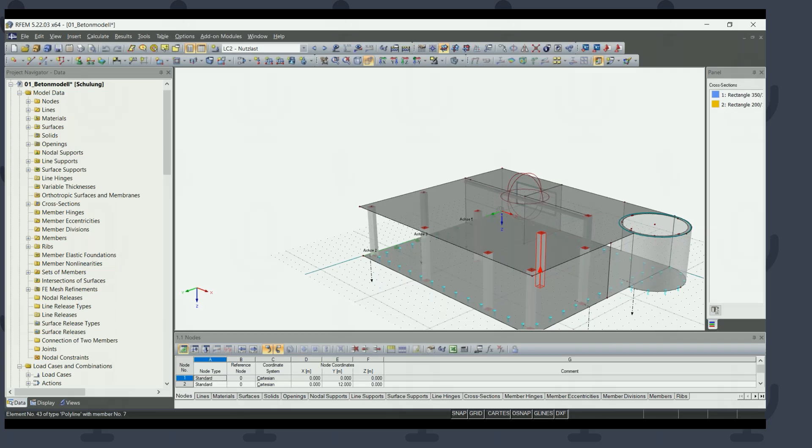Okay, perfect. So I would like to show you a little tip here. When we draw a selection window like this, for example, and then right click, you can see on the context menu all elements that are selected in this window. So if we want to edit only the nodes, you can go here to nodes and click edit, and now you can edit all these nodes that are selected in that window at once.

I could show Daniel the new flight mode maybe as well. Yeah, of course, show that. Okay, so we've got a new super cool feature called flight mode. You can press on your keyboard Shift plus F, and now with your mouse you can rotate, and with the arrows you can fly through or walk through your model.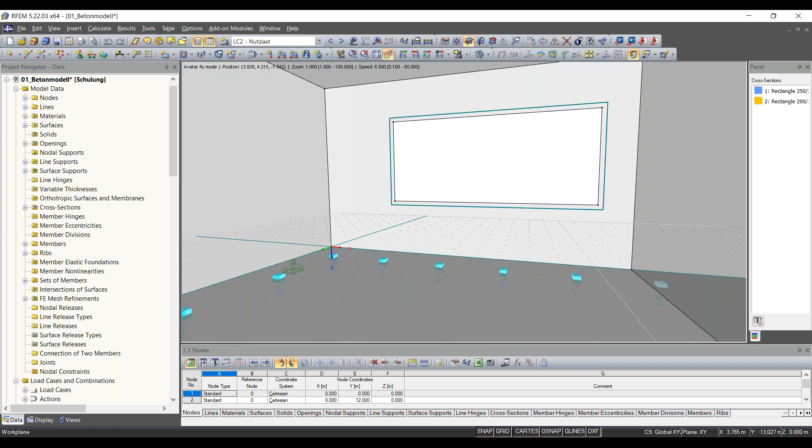I think Daniel, you can adjust the pace too. Of course, you can adjust the pace with the plus and minus keys. Okay, so you can adjust your pace with plus, for example, make it faster, and fly or walk through your model if you want to see something.

Okay, and maybe the clipping tool as well. You can go here if you've got any results, for example. Let me show you this real quick.

My loads are in German, but that's another problem, I think.

If you've got your results here on your model, go under Insert, to your clipping plane. Now you've cut through your model and can see your results at that exact line, that exact cut. You can adjust the offset, the step size, make it bigger, and of course the angle too. Change the plane, or XY for example, and view your results.

Anything else, Daniel? Maybe I could show? No. So for the attendees, when you have some questions now, please write your questions. I have time now to answer all of these questions.

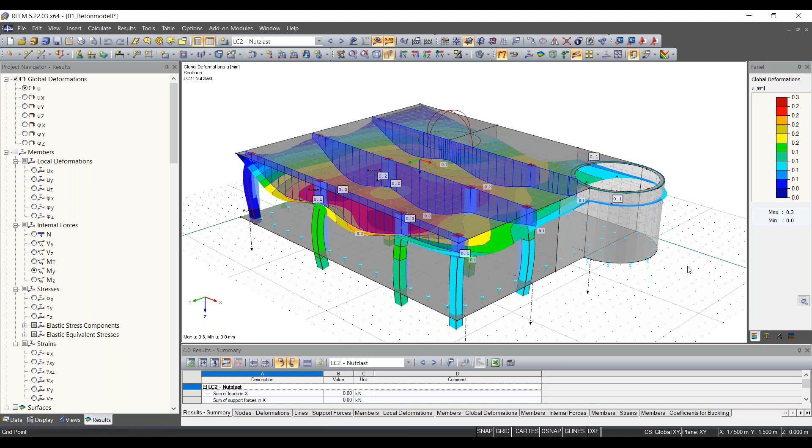By the way, this is the model which we will show in part 2. We will show you step by step how to model it and put loads on it. This will be a good guide, I think, to your first steps in RFEM.

Good, I switch to my screen now, Praxitelis. Yeah, sure.

We've got some questions. Will we be able to rewatch this webinar? Yes, of course. We will post it on our website, and after this online training you will get an email. In this email you will find the link to the recording, the link to the materials and models, and also a certificate concerning this training.

We've got another question too: how can we calculate the buckling length using the stability module? Concerning the buckling length, I'll show it here again. Open the RF Stability Analysis, go to the program, and here at the area of effective lengths and critical loads you will find the different members, in this case member number 1. When you look at the right eigenvector number, you will find the effective lengths, and these are also the different buckling lengths.

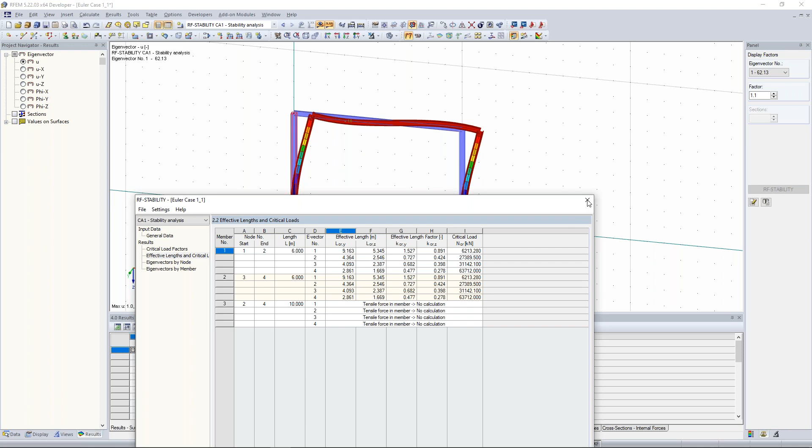When I do it again with Euler Case 1, here we normally have a buckling length of 6 meters multiplied by 2, so double, giving a buckling length of 12 meters. Let me calculate it again. Sorry, I have... okay.

So when I jump to RF Stability and go to the effective lengths, you see here the effective length factor of 2. So 2 multiplied by 6, the length, gives this effective length of 12 meters. And when you ask yourself why isn't it exactly 2, this is because of the shear stiffness. So I go back to calculation parameters. When I don't consider the shear stiffness, so I deactivate that, and calculate everything again, then you will see the exact value.

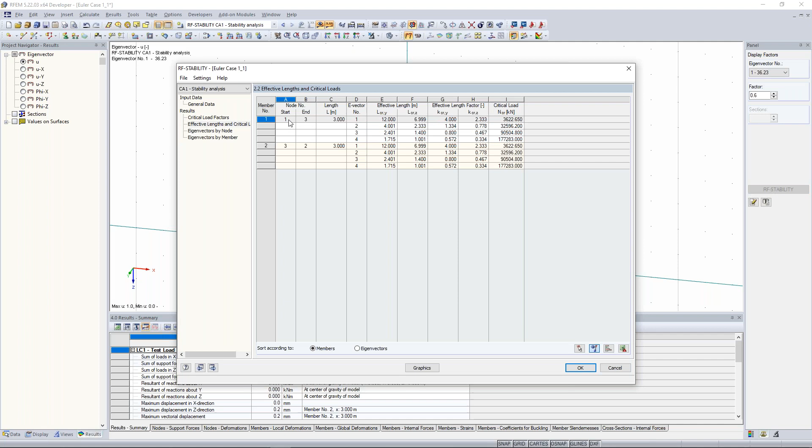Another question is, if we divide the element, will the buckling length also be calculated? Yeah, that's right. You will get the buckling length for each member number. So if you divide this length again, you will get it per member. You have to consider that there will be different results. When I divide the member exactly at the half and calculate it again, you have to consider now different critical lengths, because here you have member number 1 and 2, and here now the effective length factor is 4, but the effective length is 12. You have a different critical effective length factor—that's something you have to consider.

Good. Next question. Next is, sorry.

Whether we can export or import member locations to and from an Excel sheet. Yeah, that's possible. In the tables you have the possibility to export or import a table. When you want to import some of your members, you can do that here by members. The Excel sheet should have the same structure as here in RFEM, but that's possible—you can import and export the tables here. That's possible.

Another question I see: why do we restrict the eigenmodes to 4? What will happen if we take more? Yeah, I can show you. So what happens if we do more? First of all, I'm referring again to the type of model, to a 3D. I delete this support direction there.

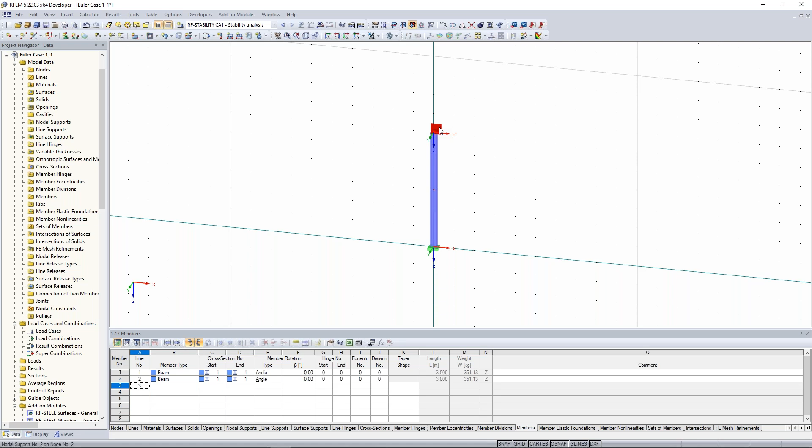Delete also this node by the help of delete node, but merge joint lines members together, and make this 10 meters high. Okay. Now my load is still there.

I calculate everything again. The reason why I want to have just 4 is that when you do a stability analysis, also referring to a design standard like the Eurocode 3, only the first cases are important for your design, because when you have here the RF stability, this would be the first fail if you would have too much nodal forces here.

The second fail would be that, and the other fails, like 3 and 4, wouldn't appear because this is too unrealistic. So this is also the reason why a structural engineer looks only at the first 2, 3, 4 eigenvectors. I think at this simple structure it's very clear, but if you have a more complex structure, then you should look maybe to more than 1 or 2 eigenvectors, because there can be some local problems or some global problems.

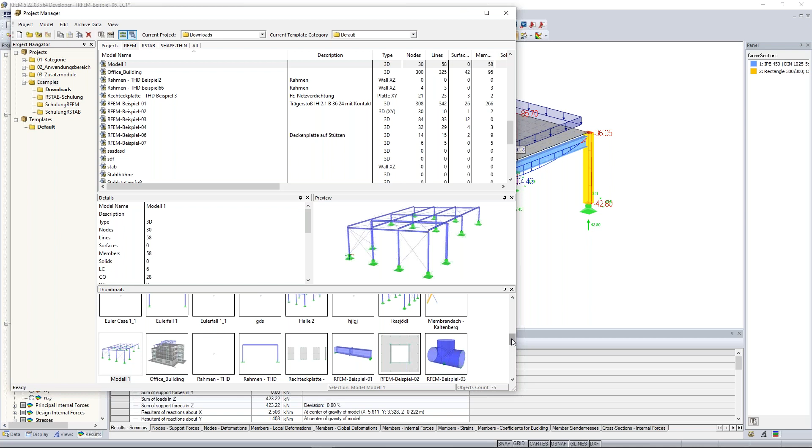So, are there some loads? There are some loads. Okay, let's make a structural stability analysis at that case.

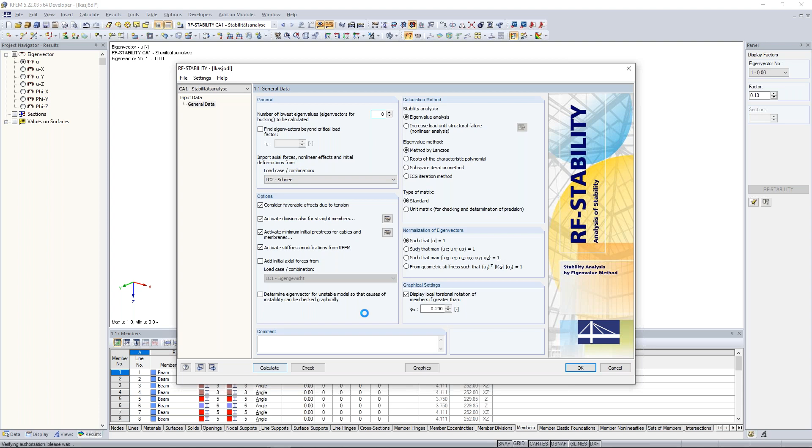Show me the graphics. And the reason is because I have here this one. Now I'll calculate it again. Sorry for that, because I have this one, determine eigenvector for unstable model, but I think this model isn't unstable.

Show me the graphics. Okay, and here we can see some interesting things. So, okay, here we can see this eigenvector, and here we can see the deformation in the y direction is a global problem, and there I think there are some joint problems, because it shouldn't be like that.

And when we look to maybe other eigenvectors, okay, there we see there's also deformation in that positive y direction or negative y direction. And we can look also to some local problems, but I think there are just some global problems. But it can be possible that one column is maybe too weak, and this would mean that we have there a local problem.

And the first reason when one column should be too weak, is that we increase the size of the cross section of that. This would be maybe one solution to do that. So this would be helpful to look at more than 1 or 2 eigenvectors.

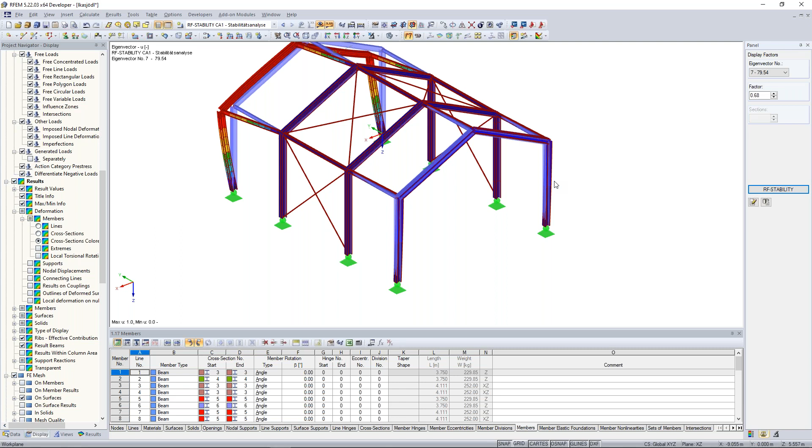Okay, good. Next question. Yes, Daniel, we had a question recently. If we could show how to perform a load combination. I don't know if you want to show it now or perhaps in a next training. So this will be part of the next training, but I can show you that very fast.

So very, very fast. I create here for that example a second load case. In this case, test load 2, but into another action category, in this case imposed. Click on OK. Now I put there an additional nodal force, in this case 300.

And then I create a new load case. We do it now manually. The next training, so the second part, we do it automatically.

So I jump here to the load combinations. I create here a new load combination, give it the name, design internal forces, and put both to that. The different partial factors are here. I click on OK.

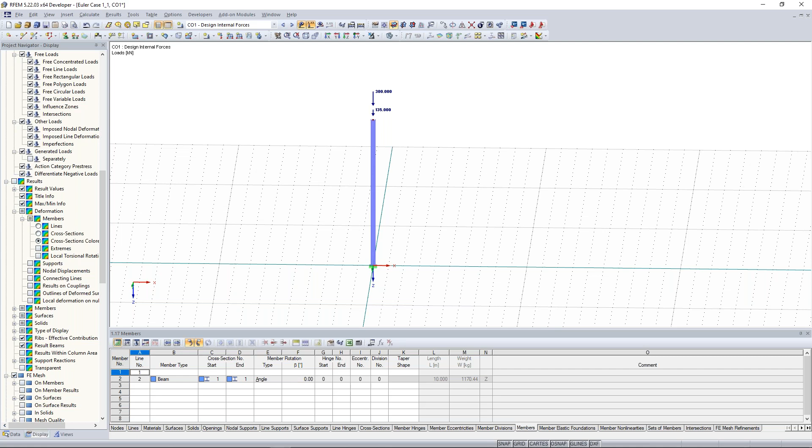Okay, so first of all, the checking of nodes, if that's okay. You have here the possibility to make a plausibility check. This function allows you to check if the whole structure is modeled okay. Also here under the tools, you have the model check.

And here you can see, for example, if you have identical nodes, so two nodes in the exact same place, and also some other things like overlapping members, lines, and so on. This is one thing, or sorry, two ways to check the nodes and also the system. And for designing joints or connections, you have to use one of our add-on modules. In this case, when you consider steel structures, you have to use... where is it?

RF joints, design of joints. This would be the add-on module for designing joints here.

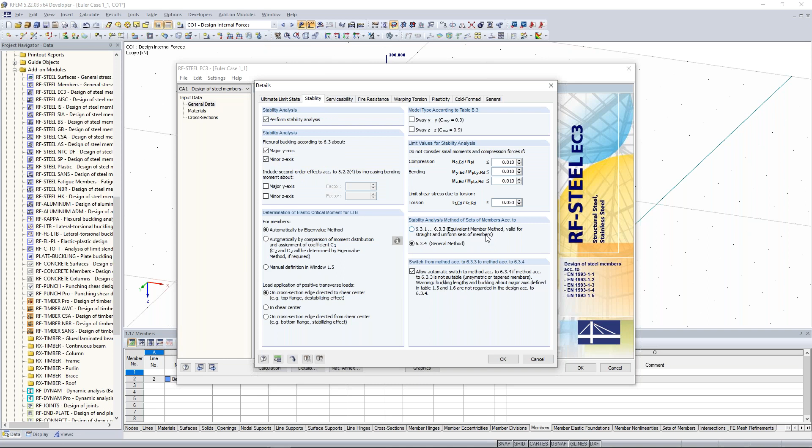There are different design possibilities to make the stability analysis concerning concrete, steel, and timber structures. And maybe in the steel structures, there is one possibility to make a stability analysis with the help of the equivalent member method. And to do that, you have to know the buckling lengths, which you can calculate with the help of RF stability. And the same also with timber structures.

Here at RF timber, I think you have a similar way to consider that. Here, effective lengths, members. You can put there the effective lengths. You calculate it with the help of RF stability. But normally you have to put it here manually. But you can add that also here with the help of RF stability. That's possible, yeah, you can do that.

Next question, and maybe also the last question, I would say. If I have to give a wind load, which direction do I need to select? First, local load related to true member length, or global load related to true member length? I think the best way to show that is in an already existing project. So let me open this one.

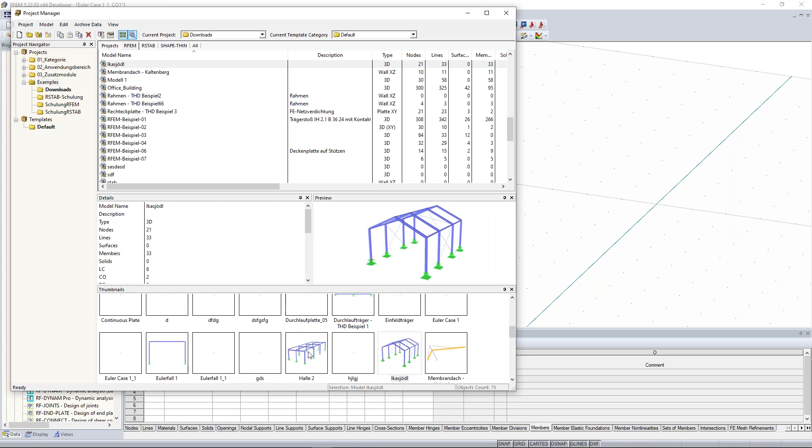Okay, so in this case I create a new load case, and this will be a wind load. There are several ways to put the load. For example, when I have to consider suction or compression forces concerning the wind loads, I have to do it like that. First of all, new member load, because these are only members. I put the wind loads, so I refer to local related to true member length.

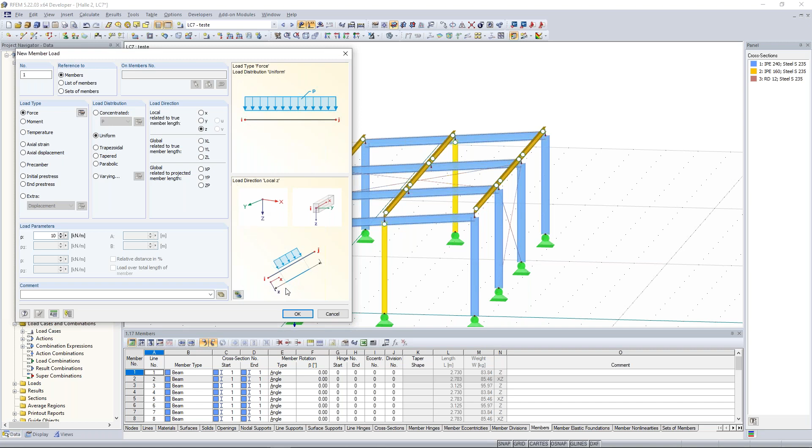And in this case, when I have to consider the suction or the wind pressure, at their value, when I want to consider the compression wind, I have to add a positive value. And when I want to consider a suction of the wind forces, negative, because it relates to the local oriented z-axis. This would be the wind load.

And when I want to consider snow loads, for example, I have to consider this kind of member load. This would be the global related to the projected member length. This would be the snow load. And this is a little bit different to the self-weight, if you have some loads on the roof.

Good. Then okay, good. Okay, then I would say let's finish this training.